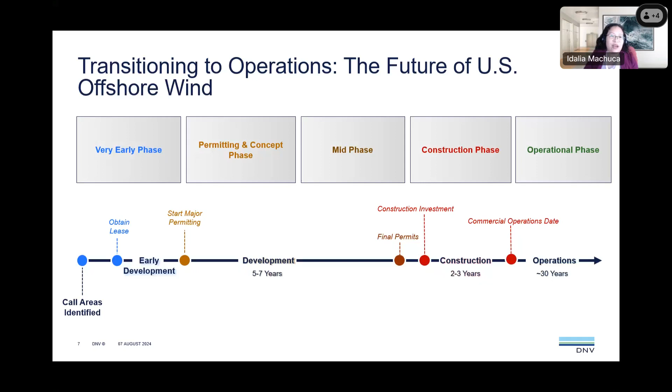As these projects enter the operational phase, the focus shifts towards effective operations and maintenance strategies. These strategies could use advanced technologies to support asset performance and longevity of these structures. Over the next few slides, we're going to discuss how these strategies and remote technologies play a key role in maintaining safety, efficiency, and reliability of operations in these offshore environments. Next slide, please.

As offshore wind projects transition into the operational phase, something important to understand will be the anticipated changes that offshore wind structures might experience over their lifespan. Offshore wind structures are designed to withstand a variety of environmental conditions, including harsh weather, saltwater exposure, and structural and mechanical stresses. However, gradual wear and tear are expected over time. Understanding these anticipated changes helps us plan for the maintenance and inspection activities needed to support the long-term durability and performance of these structures.

The major elements of an offshore wind farm include the wind turbines, foundations, and offshore electrical infrastructure such as cabling and offshore substations. Above water components such as turbine blades and towers can experience surface erosion, cracking, and corrosion due to constant exposure to the elements. Below water components like foundations and subsea cables are subject to the effects of scouring, marine growth, sediment movement, and exposure to salt water and strong currents.

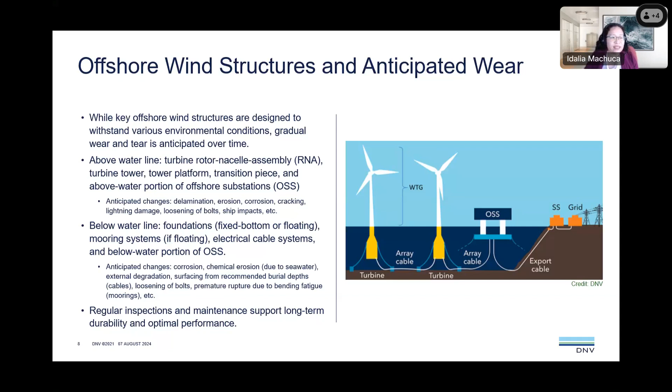Having established the anticipated changes on offshore wind structures, it's important to understand and plan for how we can systematically address these potential issues as they arise. And that leads us into our next slide. Next slide, please.

Effective inspection and maintenance strategies are guided by regulatory requirements, industry standards, and recommendations from the OEMs, being the original equipment manufacturers. These frameworks are important in maintaining compliance and upholding high standards and best practices in inspection and maintenance operations. Inspections must comply with 30 CFR Part 285, displayed on the right-hand side of this slide, which outlines the procedures and obligations for renewable energy activities on the outer continental shelf. The Bureau of Safety and Environmental Enforcement, BSEE, is responsible for enforcing these regulations, ensuring safety and environmental compliance.

Beyond these regulatory requirements, industry documents such as standards, recommended practices, and service specifications provide additional guidelines for specific systems. These documents help define best practices for maintaining the integrity and safety of offshore wind components. There are two primary approaches for inspecting and maintaining systems: the prescriptive approach, and the risk-based or condition-based approach. The prescriptive approach is based on established requirements from previous experience and safety studies, following a set schedule and specifications. The risk-based approach uses non-destructive technologies to monitor and inspect assets, providing critical input to maintaining the offshore wind assets.

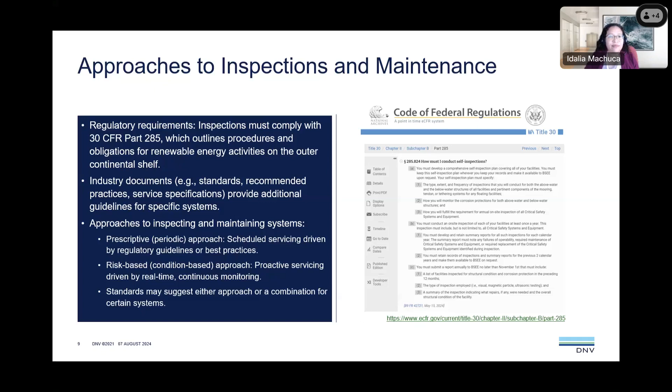Given the potential wear and tear that offshore wind components can experience, and the various requirements and recommendations for their inspection and maintenance, it's clear that regular inspection and maintenance tasks are crucial to maintain the operational efficiency and safety of offshore wind assets. Traditional methods for conducting these tasks come with inherent risks, such as exposing personnel to harsh and potentially hazardous environments. Therefore, remote monitoring methods...

Could we go back to the previous slide?

Yes, thank you. Therefore, remote monitoring methods and remotely operated technologies are increasingly being considered to conduct some of these critical tasks and to support personnel who are performing these functions. With the aid of these technologies, offshore workers can perform tasks more safely and efficiently. This approach leverages the skill and flexibility of offshore workers with the precision, consistency, and data-driven insights offered by remote technologies. Remote technologies can be employed in conjunction with condition monitoring systems, which provide continuous real-time data on the condition and performance of critical components. This integrated approach enables the early detection of potential issues and supports proactive maintenance of key components.

In turn, this approach reduces the likelihood of unexpected complications that would require unscheduled repairs. Additionally, remote technologies are well suited to perform necessary tasks following severe environmental conditions like those listed previously, such as icing, extreme temperatures, seismic events, and storms.

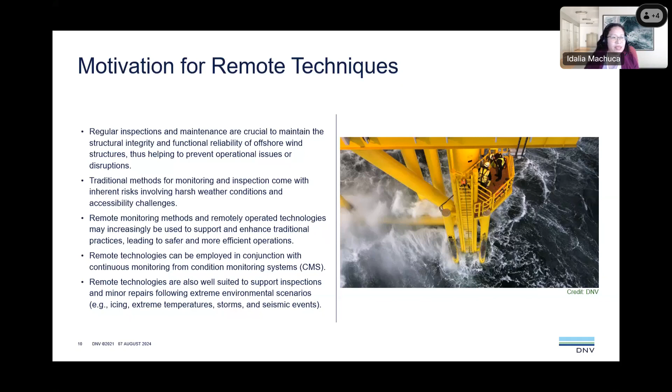Given the potential utility of remote technologies in supporting offshore tasks, we'll now take a deeper look at the various remote monitoring methods available and explore the types, functions, benefits, and limitations of remote technologies.

Before taking a deeper look at the types of remote technologies used for offshore wind operations, we'll take a moment to review the various types of remote monitoring methods that can be employed in the industry. These methods involve diagnostic and prognostic activities that provide qualitative and quantitative feedback on the structural and functional status of key components within an offshore wind farm.

Displayed here is a list of the various types of monitoring methods, including visual inspection, radiographic inspection, ultrasonic inspection, thermographic inspection, infrared thermography, accelerometer vibrations, acoustic emissions, and so on. These methods use a variety of equipment, including cameras, sensors, and fiber optic cables to collect data from photos, videos, scans, and measurements. The data collected through these monitoring methods is processed and interpreted to diagnose and potentially prevent downtime associated with several types of issues.

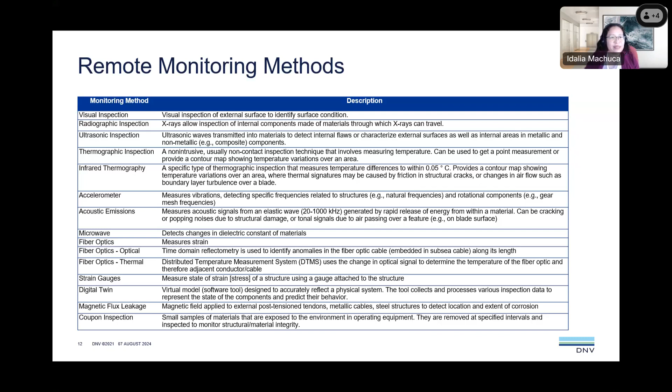We'll now move on to some specific examples of remote technologies that use monitoring methods, and we'll discuss their applications. The remote technologies we'll be discussing are drones, crawlers, ROVs, and AUVs. These technologies have unique capabilities and applications that support offshore wind inspection and maintenance efforts.

First, drones, also known as unmanned aerial vehicles. These are remotely controlled aircrafts that can be equipped with cameras and sensors for aerial surveys and inspections. In the context of offshore wind, drones can access hard-to-reach areas and capture detailed images and data to help detect surface damage, corrosion, and other issues.

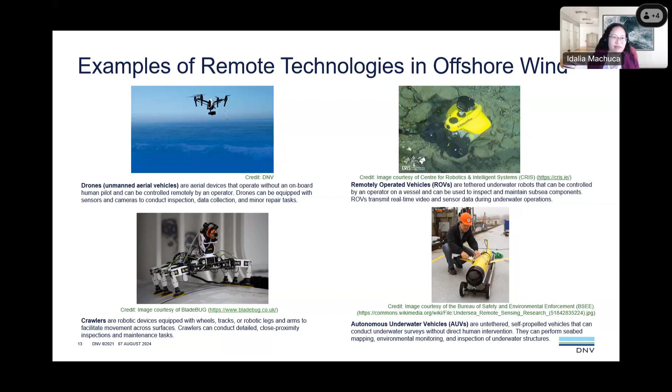Okay, so we've had a brief overview of these various different types of remote technologies. So now we're going to be looking at how these technologies are deployed.

First, drones. Drones can be deployed from vessels that transport personnel and equipment to the wind farm, offering flexibility and ease of access to various turbine locations. Drones can also be launched directly from the nacelle or from inside the hub of a turbine for immediate inspection of the blades and other components.

Once launched, drones are controlled remotely, providing real-time video feeds and sensor data to operators. Drones are used to inspect turbine blades, towers, connections to the transition pieces, platforms, and ancillary structures above the waterline. Their high mobility and advanced imaging and video capabilities make them ideal for identifying external damage and corrosion, among other issues, quickly and systematically.

Second, we have crawlers. Crawlers can be deployed from within the turbine hub to inspect blade interiors, or from the tower base to examine external surfaces. For external inspections at higher elevations, crawlers can also be lifted using ropes. Depending on the complexity of the task, crawlers can operate autonomously, or they can be controlled remotely by technicians, allowing access to difficult to reach areas without requiring personnel to climb the structure or enter a confined space.

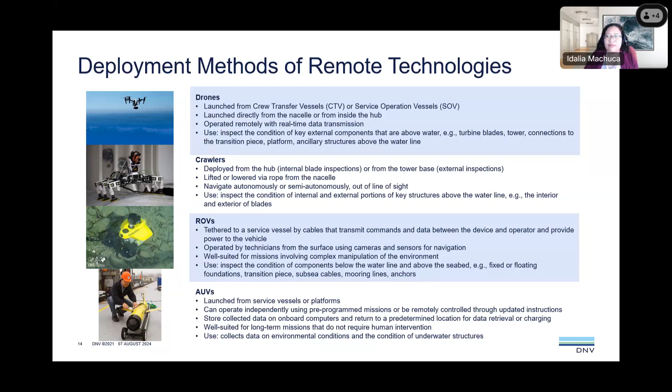These technologies offer a wide range of capabilities and can be equipped with various tools for data collection and minor repairs. So here, we're going to highlight just a few examples of what these technologies can do to support offshore wind inspections and maintenance.

Drones can be used for high-resolution visual inspections, offering an aerial view to detect surface defects and structural deformations. Drones can also perform ultrasonic inspections to measure material thickness and identify internal flaws within blade structures, for instance. They can also be equipped with tools for minor repairs on surfaces, such as fixing cracks and applying protective coatings.

Crawlers can also be used for high-resolution visual inspections, providing detailed information of both internal and external surfaces. And what's important here is that we can get that very close proximity inspection of surfaces. Crawlers can also perform thermographic inspections to identify heat signatures and pinpoint areas of overheating in electrical components.

They can also be equipped with robotic arms and grippers to carry out minor repairs, like applying protective coatings, sealing cracks, tightening bolts, making them a versatile tool for maintaining the structural integrity of key components.

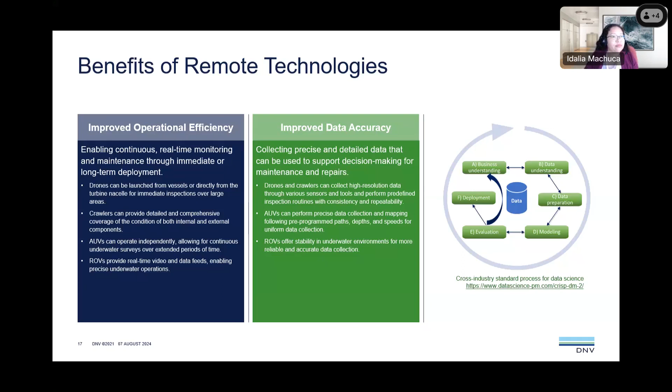As we have touched on earlier, integrating remote technologies in offshore wind operations can support our approach to proactive maintenance and, as a result, improve cost efficiency. These technologies can be leveraged for early detection of potential issues, facilitating a condition-based approach to inspections and maintenance.

By conducting precise, rapid, and consistent inspections, these technologies can help us identify and address problems before they escalate. This approach helps to optimize cost efficiency by minimizing operational downtime and preventing costly disruptions. The operational efficiency of these technologies also contributes to cost savings in the performance of these inspection and maintenance tasks.

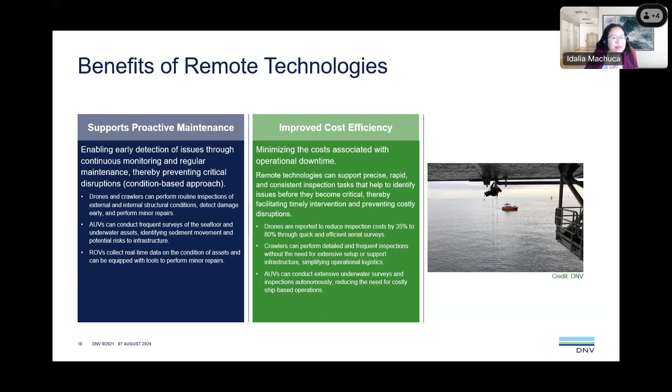Some additional considerations for the use of remote technologies. One of the key technical limitations that we see in many remote technologies is a restricted battery life. This can limit the duration of inspections and maintenance tasks, requiring careful planning for recharging the device. Additionally, there could be maneuverability challenges depending on the environments that these technologies operate in.

For example, crawlers may face challenges in navigating uneven or slippery surfaces, and ROVs can face limited movement due to their cable connection to the vessel.

Weather sensitivity is another factor to consider. High winds, extreme temperatures, moisture, and poor visibility can all impact the performance of these remote technologies. These limitations can delay operations and require contingency plans to manage weather-related disruptions.

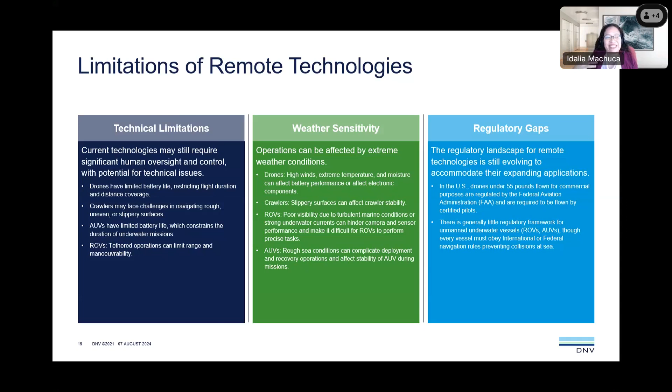It's also important to note that the regulatory landscape for remote technologies is still evolving. As the application of these technologies expands, further clarity will be needed to ensure safe and effective use. We have examined the capabilities, benefits, and limitations of remote technologies. Now we'll dive into my favorite part of this presentation, a case study showcasing one of these technologies in action. Next slide, please.

Recently, an ROV was deployed at the Windfloat Atlantic offshore wind farm off the coast of Portugal for inspection purposes. Windfloat Atlantic is the world's first semi-submersible floating offshore wind farm, and the ROV survey was conducted by a team of researchers at CRIS, the Center for Robotics and Intelligent Systems at the University of Limerick.

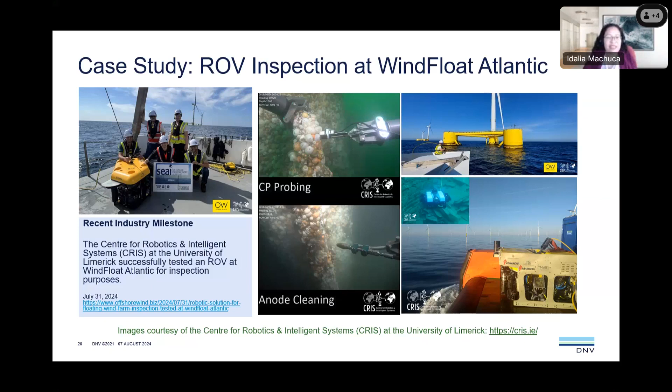In the next slide, we'll share a video of the sea trials at WindFloat Atlantic showing the ROV in action. We'll try to see if we don't have any technical issues, fully appreciate the technology's capabilities demonstrated during these trials. So let's go on to the next slide and see if we can play this video.

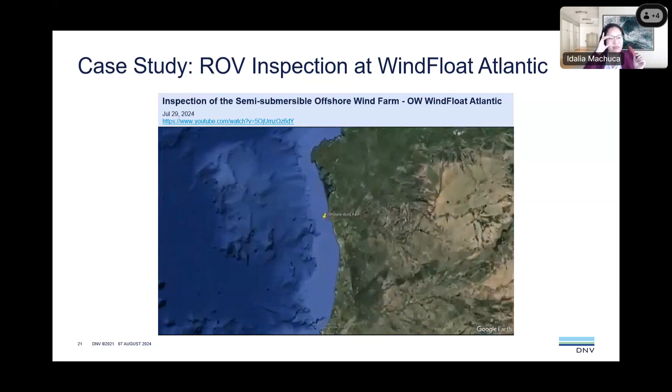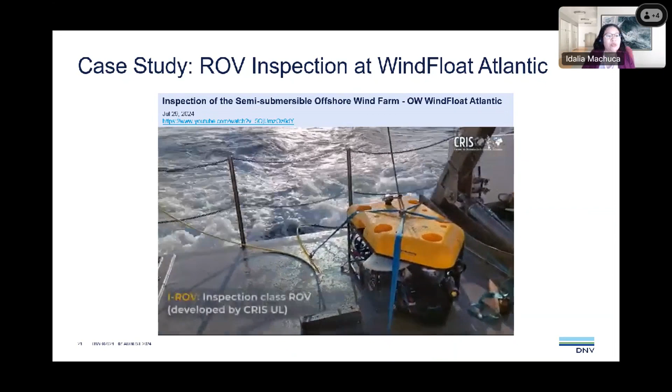Okay, so here we are getting a shot of WindFloat Atlantic off the coast of Portugal. We're seeing that the objective of these sea trials is to perform a visual inspection. This is the ROV that they deployed for the sea trial.

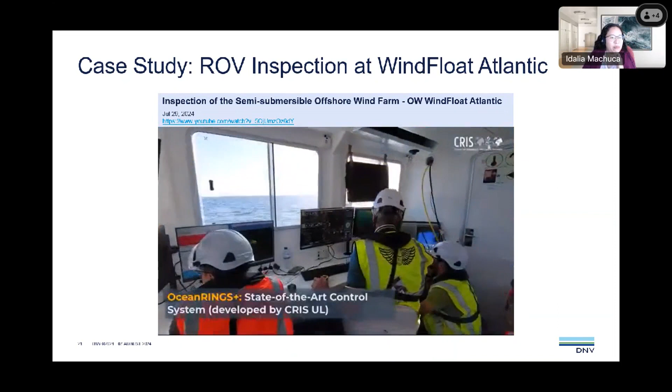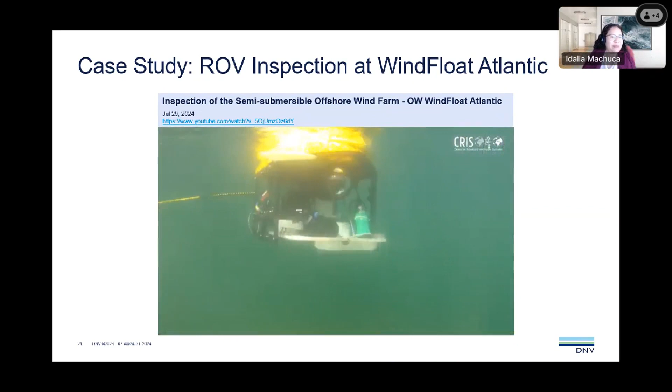Getting a little bit of background on WindFloat Atlantic and a close-up view of what the semi-submersible looks like. OceanRINGS+, as I mentioned, is the control system, the software tools that they have developed. We see the researchers working live.

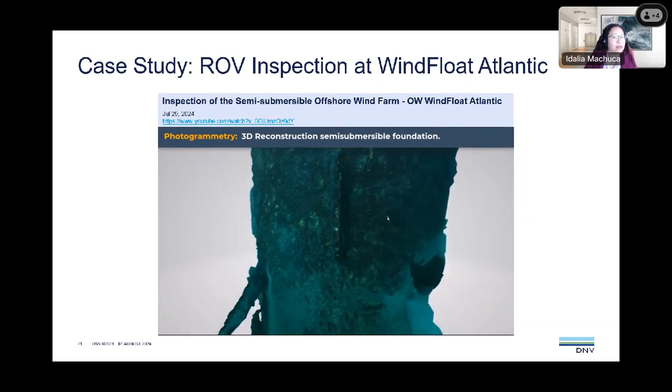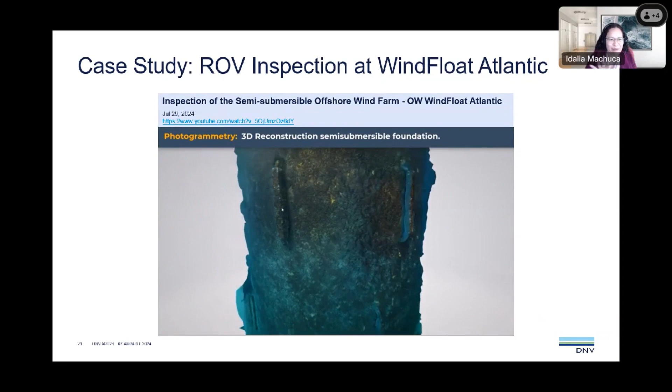Okay, so this is showing the DSLR camera images captured, a 3D reconstruction of the semi-submersible foundation. This is really amazing, right? Because you can explore the structure while not necessarily being underwater. You can get a detailed view and manipulate the images captured.

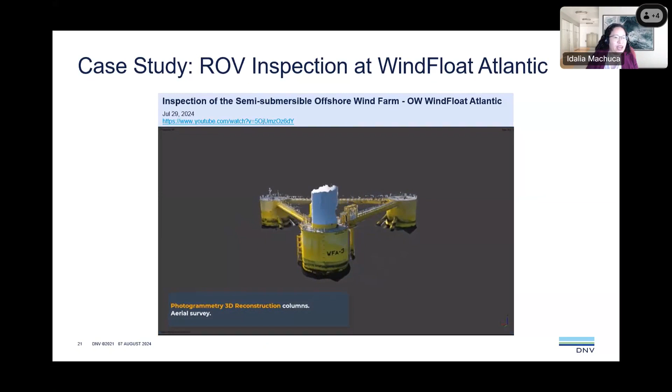And then this is a 3D reconstruction of the columns of the semi-submersible, but this is using an aerial survey. Great, and that was a neat picture of the team out there. Must have been an exciting day. Okay, next slide, please.

So as we look to the future, the rapid development of offshore wind is propelling innovation in remote technologies, further revolutionizing offshore wind operations. The current status of remote technologies varies, with some being commercially available and others in various stages of development.

Significant innovations are occurring in two specific areas: one being the development of sensors to diversify and expand the payload deployed on these remote technologies, as well as enhancing their autonomy in carrying out these tasks. The second major area of innovation involves digital tools and the application of data science principles to the processing of data collected from not only remote technologies, but also other traditional methods like in-person inspections, condition monitoring systems, and environmental monitoring tasks.

Innovation in digital technology is poised to transform the industry through advanced techniques in data processing, machine learning, artificial intelligence, virtual reality, numerical modeling, and digital twins. The integration of data-driven technologies is expected to enable a holistic assessment of the condition and performance of offshore wind assets, which will then be used to support risk-based planning and is anticipated to reduce unplanned downtime and improve asset reliability as well as worker safety.

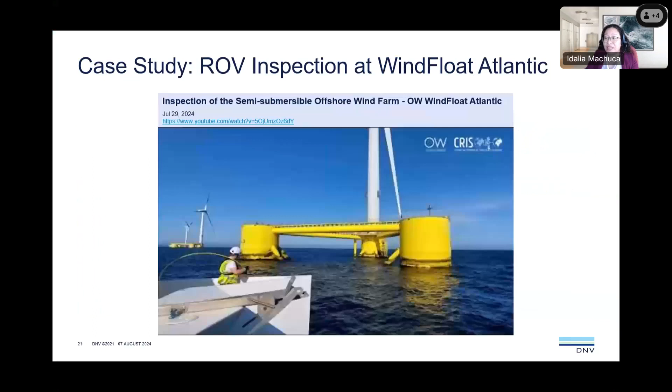One last question: are wind farm owner operators using any of these technologies for surveillance or protection of wind farms? Oh, surveillance and protection - that sounds like the person asking this might be asking more about security.